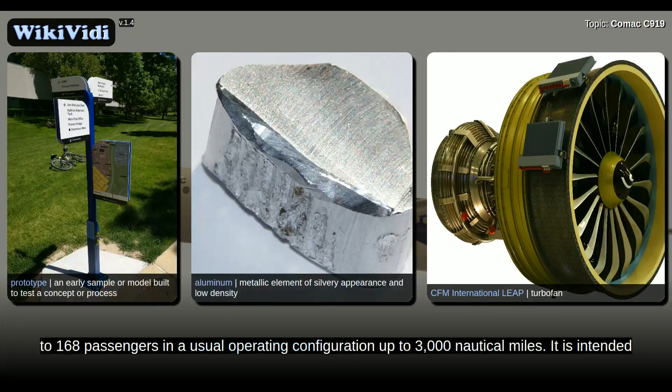The aircraft is mainly made out of aluminium. It is powered by CFM International LEAP turbofan engines and can carry 156 to 168 passengers in a usual operating configuration up to 3,000 nautical miles.

It is intended to compete with the Boeing 737 MAX and Airbus A320neo. As of November 2016, 570 aircraft have been ordered from 23 customers, mostly Chinese, but also American and Thai leasing companies or airlines.

Development. The 2008 program launch initially targeted a maiden flight in 2014. Comac applied for a type certificate for the aircraft from the Civil Aviation Administration of China on the 28th of October 2010. The company intends to manufacture up to 2,300 aircraft of that type.

In June 2011, Comac and Irish low-cost airline Ryanair signed an agreement to cooperate on the development of the C919 in 2012. Airbus chief strategist Marwan Lahoud was assuming that the aircraft would offer competition to Airbus by 2020.

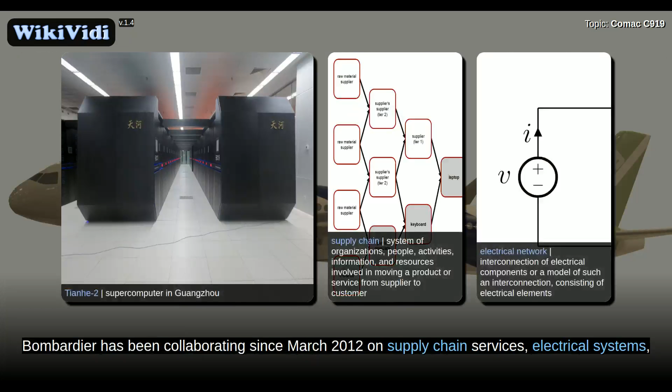Bombardier has been collaborating since March 2012 on supply chain services, electrical systems, human interface and cockpit, and on flight training, flight test support, and sales and marketing.

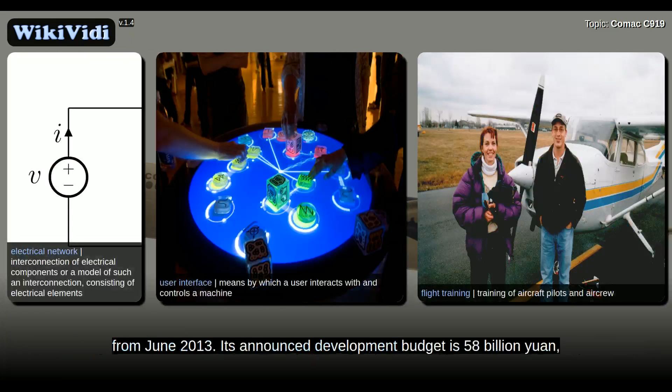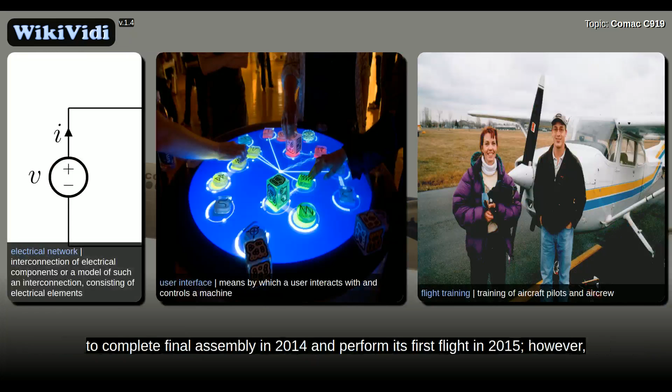From June 2013, its announced development budget is 58 billion yuan, but its actual cost is estimated at well over $20 billion. The flight test bed was expected to complete final assembly in 2014 and perform its first flight in 2015. However, delivery was delayed again until 2018 due to technical difficulties and supply issues.

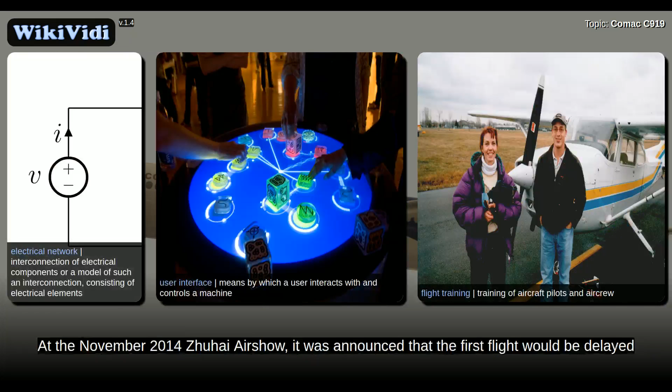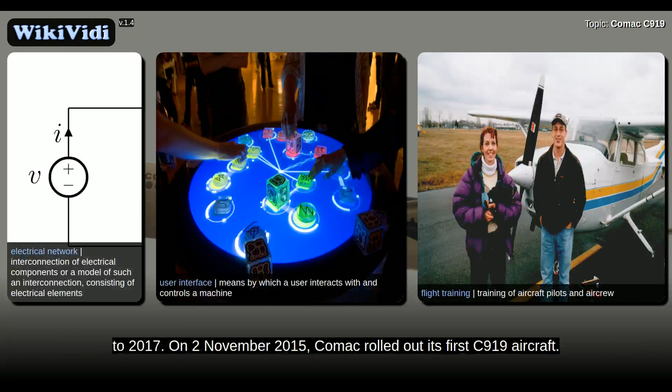At the November 2014 Zhuhai Air Show, it was announced that the first flight would be delayed to 2017. On the 2nd of November 2015, Comac rolled out its first C919 aircraft. High-speed taxi tests were completed in April 2017 and the first flight took place on the 5th of May 2017.

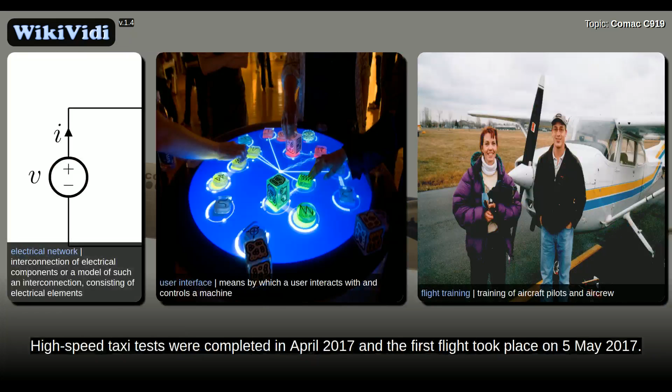Comac has a planned test program of 4,200 flight hours and introduction to service in 2020 with China Eastern Airlines. Slippage into 2021 is possible.

Design. The dimensions of the C919 are quite similar to those of the Airbus A320. Its fuselage is wide and high with a cross-section. This may allow for a common unit load device to be used for both aircraft.

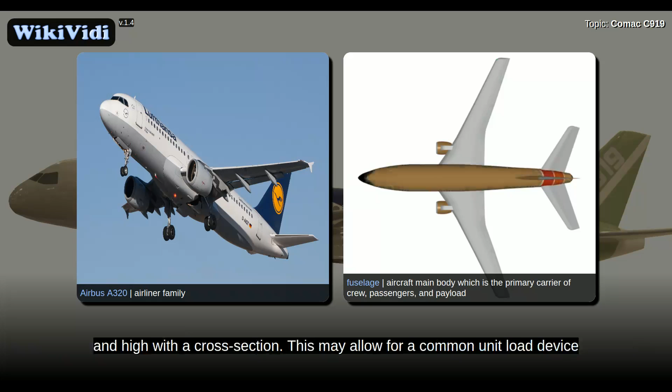It has a wingspan. The aircraft's intended payload capacity will be 20.4 tons. It will cruise with an operating ceiling of 12,200 meters. There will be two variants, the standard version with a range, and an extended range version.

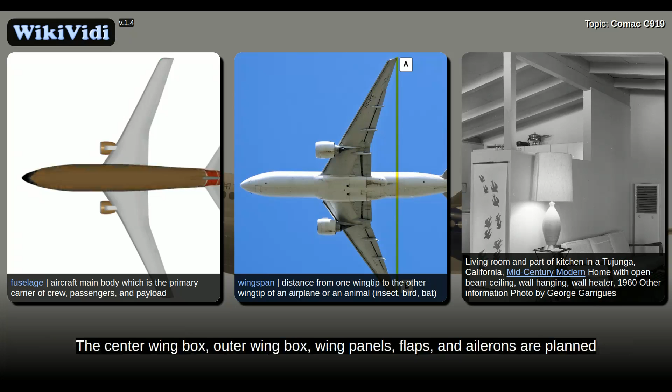The center wing box, outer wing box, wing panels, flaps, and ailerons are planned to be built in Xi'an, China. The center fuselage sections are planned to be built in Hongdu, China. Aluminium-lithium alloys account for 8.8% of the structure, and composite materials for 12%.

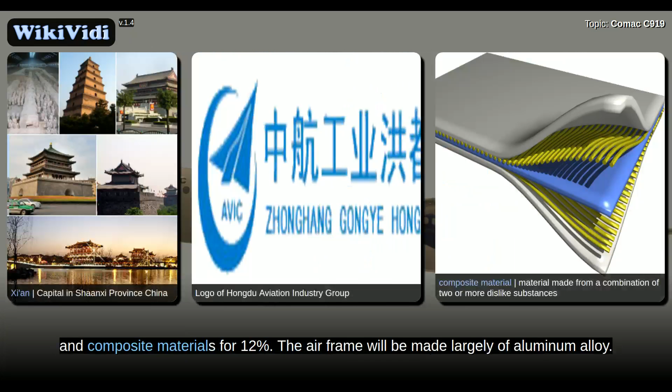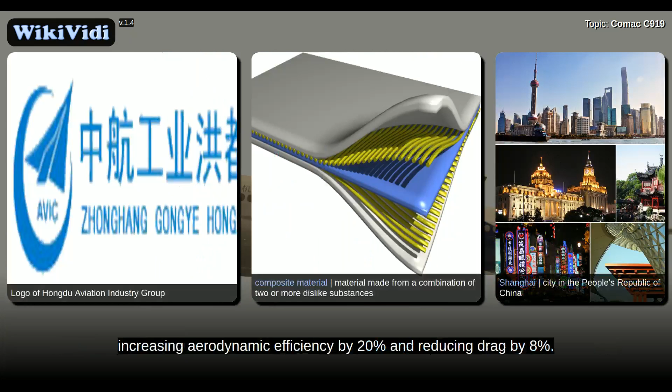The airframe will be made largely of aluminum alloy. Aircraft design and assembly is performed in Shanghai. The wing is supercritical, increasing aerodynamic efficiency by 20% and reducing drag by 8%.

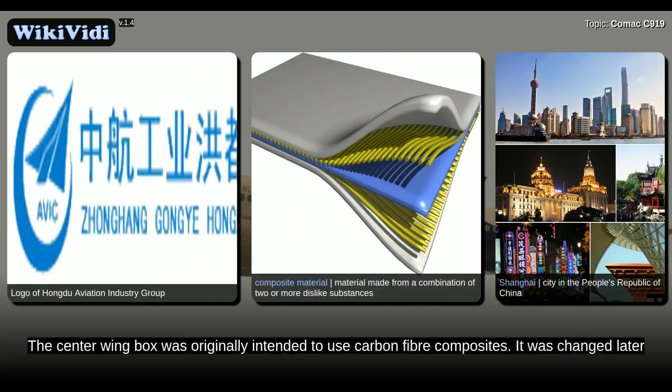The center wing box was originally intended to use carbon fiber composites. It was changed later to an aluminum design to reduce design complications.

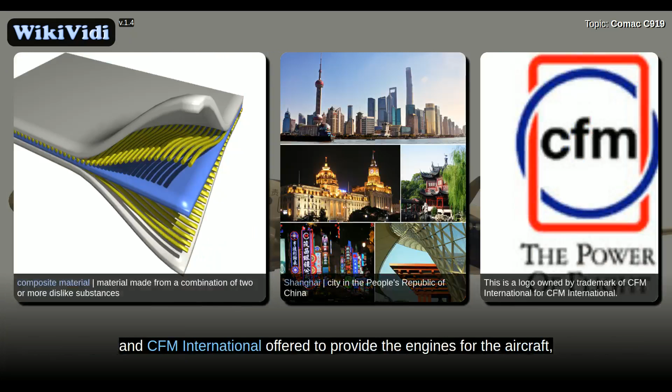Mock-up. Both Pratt & Whitney and CFM International offered to provide the engines for the aircraft, the former offering the PW1000G and the latter the LEAP-1C. The latter was ultimately selected.

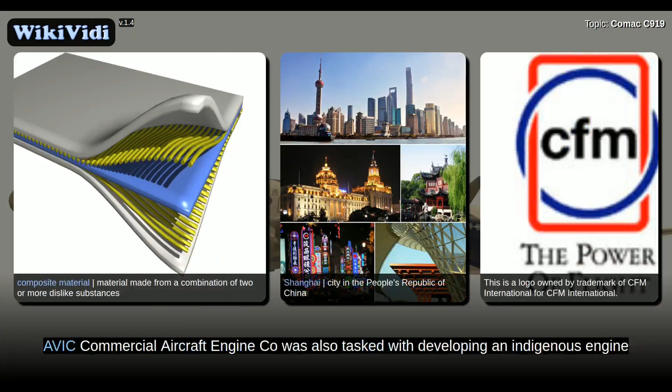AVIC Commercial Aircraft Engine Co. was also tasked with developing an indigenous engine to be used with the aircraft. The ACAE CJ1000A was unveiled at the 2012 Zhuhai Air Show.

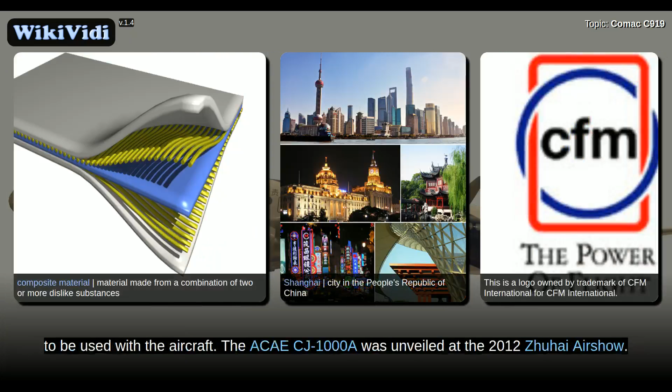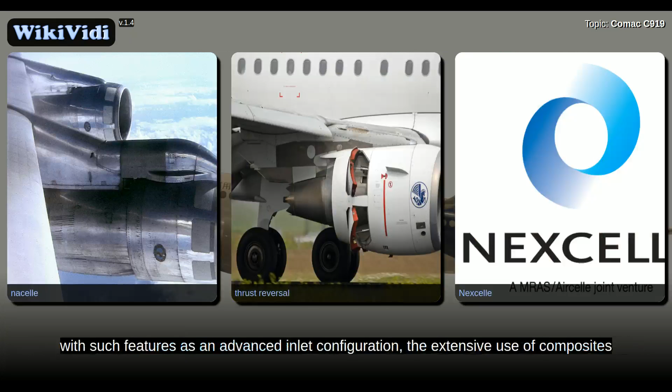The engine's nacelle, thrust reverser and exhaust system will be provided by Nexcelle, with such features as an advanced inlet configuration, the extensive use of composites and acoustic treatment, and an electrically operated thrust reverser. Michelin will supply AirX radial tires.

Market. In 2012, the C919 order book stood at 380 units worth $26 billion and averaging $68 million. Flight Global's Ascend market values in 2013 were $49.2 million for the Airbus A320neo, less than its $100.2 million list price, and $51.4 million for the Boeing 737 MAX 8, less than its $100.5 million list price.

In June 2015, the China National Radio predicted a $50 million price, cheaper than the B737 or A320 list prices. The Chinese airlines that have placed orders for the C919 already have either the Boeing 737 or Airbus A320 in their fleets.

In 2013, Chinese state-owned newspaper Global Times complained that an Aviation Week editorial about the bleak prospects for the aircraft maliciously disparaged the future outlook for the C919.